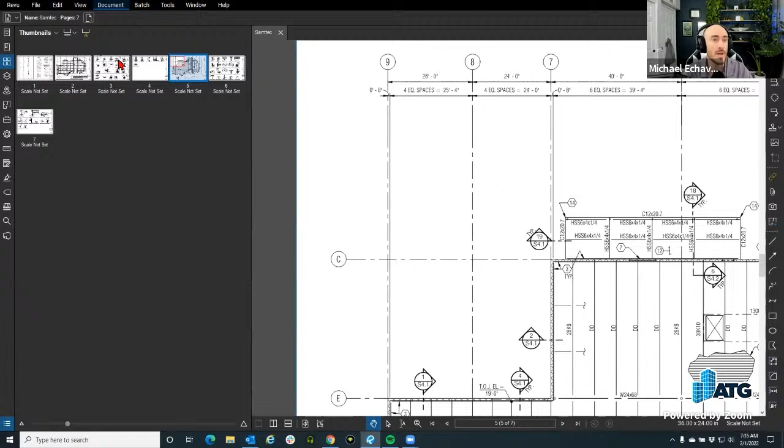So under the document here, you do have the option to go through and select the same commands that I'm going to show you in a second; they are also right here. Now, if you're in the thumbnails area, it is the 4-quadrant square. And if you do not see that panel, you can always right click and say show. And from the show, you can go down to the bottom. It's Alt plus T for the hotkey on this one.

Now, again, in the thumbnails panel, you can right click in the open area. You have the same document manipulation capabilities in here as well. One thing I do like to keynote in here is the markup summary report that you can quickly print out here versus having to open the summary from the markups list and then selecting the summary from here. You can always be in document management and right click and quickly create a markup summary report from here as well. I've never noticed it being there. Yes. Look at that. So that's always a great addition to see when you're right clicking.

You can go to the thumbnails top panel as well. You have the same drop downs, right? I just prefer to right click, just old habits die hard. Right. No doubt. I don't like to use menus as much as possible.

For those folks, I was actually seeing my eye doctor yesterday, that are not as, what would we call it, visually inclined, there's the smaller triangle on the left-hand side, the larger triangle on the right-hand side in your bottom location down here. And what you can do, it's a drag bar. So what it allows you to do is zoom in on some of your documents.

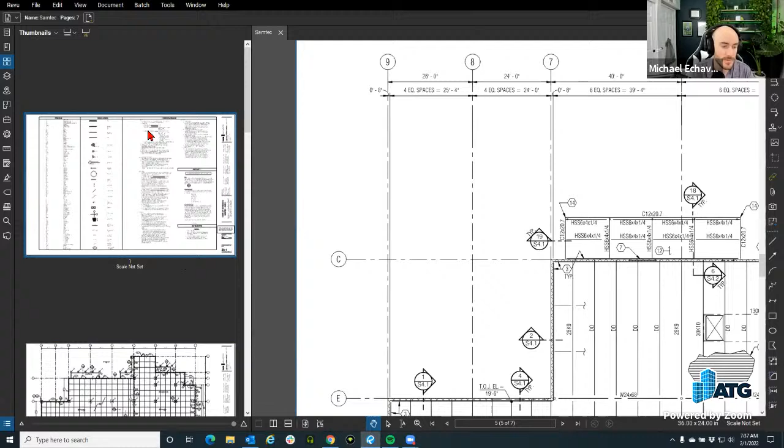Now let's cover some of these in here. I think I've done all of them, but if there is any Easter egg in here, of course, we're always going to talk about some Easter egg stuff. The first one we'll talk about is page setup. Would we agree, Jason? Yep. Okay. So page setup is great if you have an off-skewed scan, which would be like a raster. And there's some other things we could do in here as well.

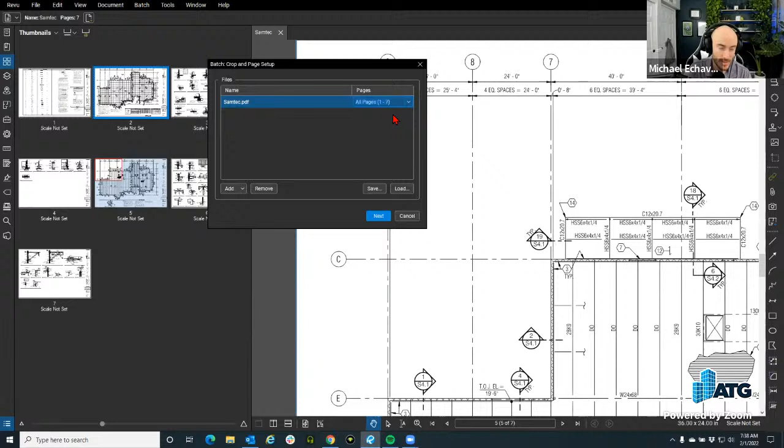But you can add PDFs from here before going in. You can also select specific pages. I'm going to do all pages instead of the selected. By default, it goes through what you have selected. Then we're going to hit next. And this is the window that we're going to be talking about. So there's a couple of different things that you can do within here. So you can change the size of the PDF set.

That does happen sometimes where folks ask, can we reduce it down to an 8.5 by 11 or whatever the half size is of the sheet by the correct scale? This is how we're going to accomplish that. You can do that directly in Revu. You don't have to go file, print, and reduce the size. This is the area where you would go through and do that to get it correct to the scale.

So you're saying that if you've got 11 by 17s and 36 by 24s, you can force them all to the same size? Yes. Well, you could force the ones that you selected. So you could go from the 24 by 36 to 11 by 17, and you're just going to select 11 by 17, and that's going to change these. With keeping the scale, right? Because that's what we want to do. Right. Yeah. So you get that auto scale checked on there. Yes.

And I don't know why you'd want portrait. You would want landscape, but you can select.

Now, if we're trying to rotate our pages, there's a get line. This would allow us to fix an off-centered or slightly rotated scan because they didn't butt it up against that corner. You could go and get a line, and then say you're going to rotate from this line however many degrees.

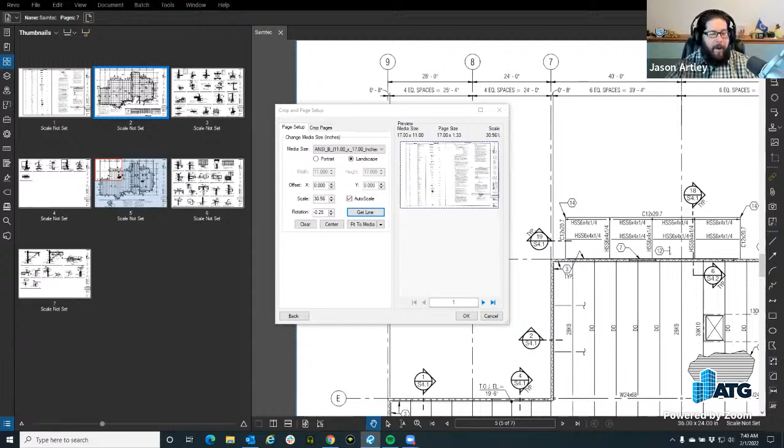That's huge, because I know in all the scanning I've done in my career, sometimes you go through them and think, oh, that one was off. You didn't get it in the corner right, or somebody bumped you or whatever else. Now you can fix it without having to rescan it. That's pretty big.

Now, the other one is crop pages. Do I need to go through and talk about cropping pages? Might as well.

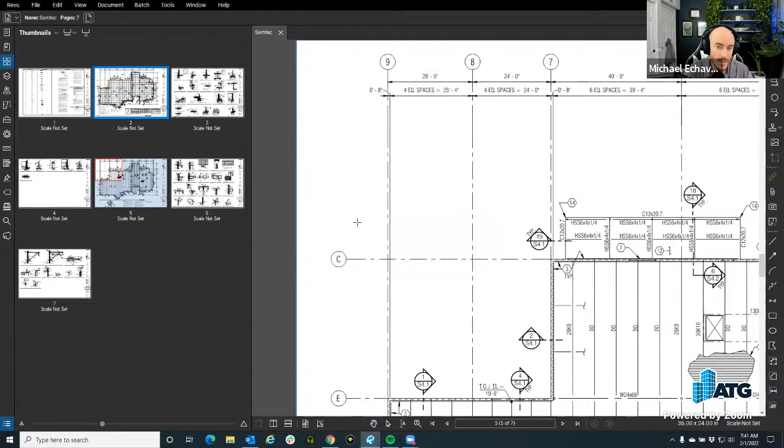So from here, you have the ability to go through and trim. You could bleed however you want to select specific content to crop to that location. These are your options down here. You also have the ability to clear that and get a window of where you want to crop.

Art box. I don't know what art box is. Oh, maybe you can just draw different ways and not just a rectangle or a four-sided thing. I don't know, I clicked it and it didn't do anything.

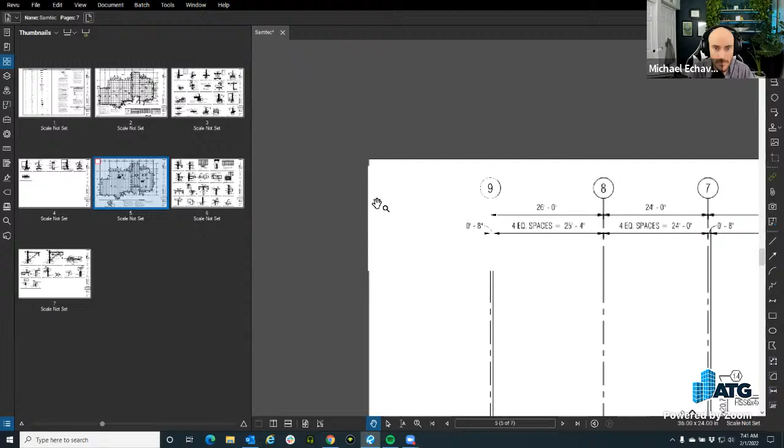Art box, it's probably like one of those blend things, you know. That's weird, like a stamp. It's a specific type of blend mode. It gives it a box.

Oh yeah, because that wasn't there. Okay, so it gives it a box around where it's cropped. Matt. Now you know. Good question. Now I know too.

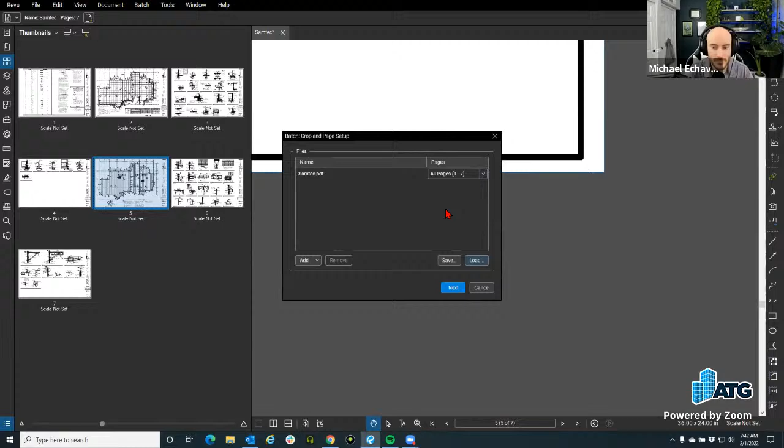All righty, okay, so let's go back and talk about some of the other items as well.

Now, right-clicking, you have set scale. This will allow you to set scale to your PDF sets. I was talking with somebody recently that the set scale in the older versions let you have a set scale just overall in Revu.

That's one thing that doesn't transfer over from the newer version, so just be aware you have to set scale per document. It's not setting scale in Revu as a whole, it's per document. That is a change, but you can set scale for the entire document set if you wanted to. So you can do custom range, current, all pages, if they're all the same.

I know for a fact these are different. And maybe if somebody wants to know about different view scales for different viewports, we can do that as well. Just ask in the chat or on YouTube Live, because we are YouTube Live as well.

So you can set the scale here. You do it by preset, meaning what already exists out of the box from Bluebeam in their software of Revu, or custom, which is picking from two points. This is what happens usually if you receive a PDF set that is scanned or not a known scale, but you know, or there is a known dimension.

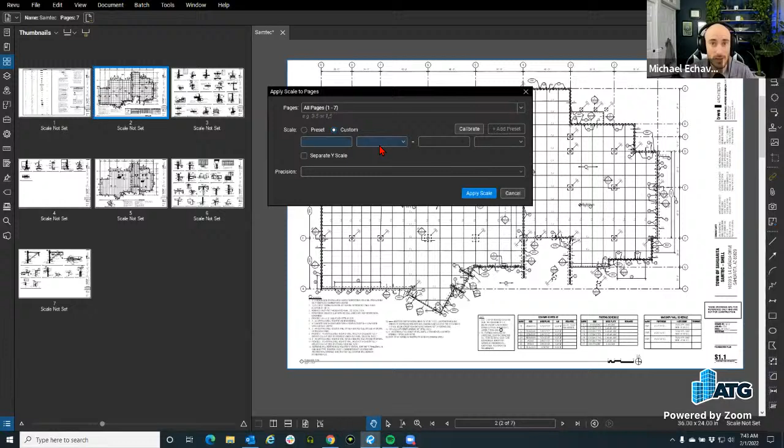Let me reword that. You want to go off of this first measurement, which will be the set dimension on the page, right? What is the actual dimension on the page size-wise, and then the reality of what it actually would be built. Was that correctly worded, Jason?

I would say so. So Chris has a good question: if you have a scan and you don't know the scale, but you want to plot it at 1/8 inch. This would be calibrating to figure out what known dimension you do have, and then you would use that scale document to scale it accordingly if you wanted it to print at 1/8 inch equals a foot.

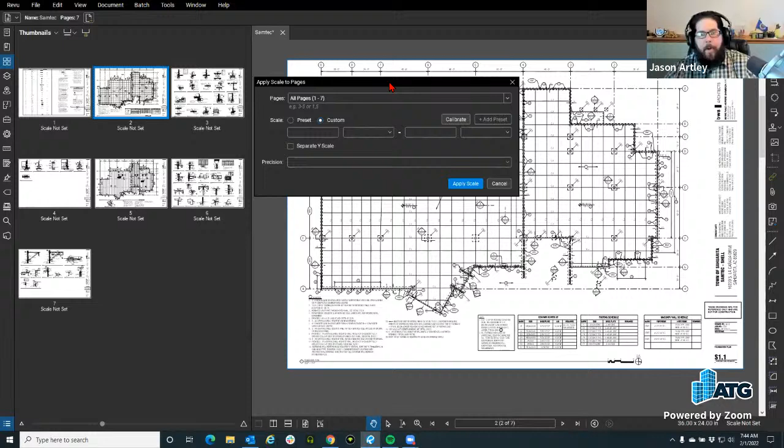It's always good to check. Never trust anything on here because we don't always know if it was created in Bluebeam, Adobe, or whatever version. So just because you see a scale bar doesn't mean you shouldn't get in there, calibrate to the scale bar, and double check everything.

Always verify. And if you're in the same department as civil, you can have a different Y. So X and Y for doing pipe networks or anything like that, you have the ability to do a separate Y scale, which is great for all of you folks on that PDF set. For me, not so much.

I neglect that checkbox a lot. And then your precision, so what is your... yes, 3/32. So your precision of what your rounding is going to be for your measurements, I prefer just to do 1, hit apply.

And now also, if you don't see them here in your thumbnails panel, the automatic measurements below, the first thing I always recommend is going to labels, which is this icon right here, hitting the drop down, and then you have labels and page scale. So you have those options to show that there's a scale below, which was an update, by the way, showing scale below your thumbnails, which, well, I'm not going to allude to anything until the end of this training.

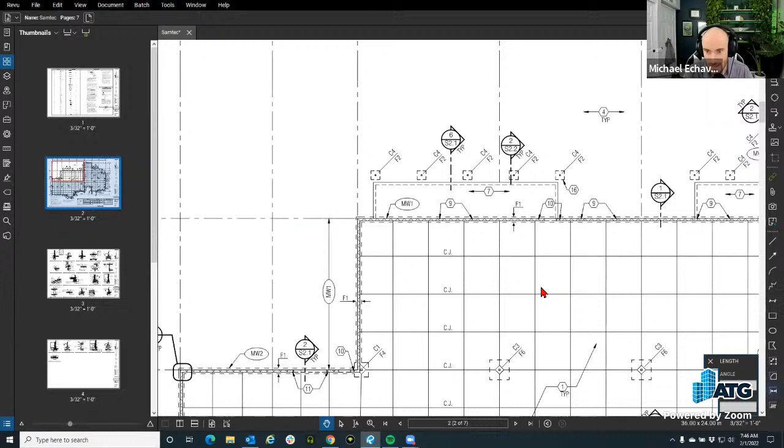But okay, so from here, now we have a set scale. We can go and do all of our measurements. And if you're wanting to look at all of our measurements and what our measurements do, we have an older morning coffee review that we have done before, and you can go in and measure off on your screen.

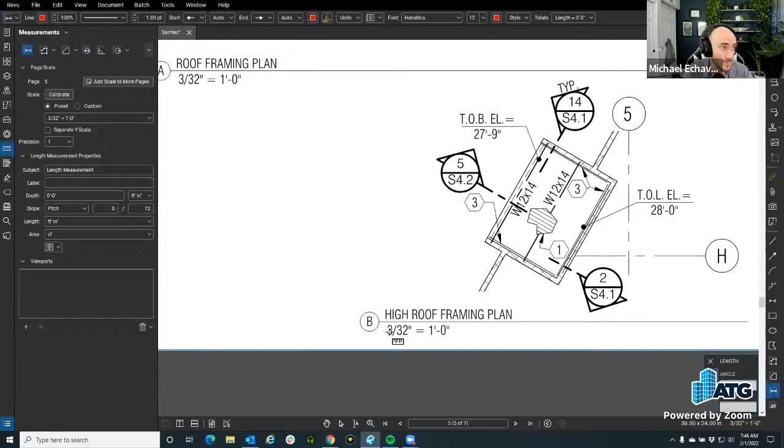Now, if you want different viewports, which this one doesn't have, let's see, does this one have? These are both 3/32nd. If you wanted to do a separate viewport, there is the measurements panel, and from there you have viewports, and this is where you'd create a secondary viewport to get two different scales on a specific page. Like if this wasn't 3/32nd, it was, I don't know, a quarter of an inch, you could do a viewport around it so your measurements were accurate for that specific area location on your PDF set.

That was the question that Marvin had. So you can have multiple scales on one page. Is there a limit to how many viewports you can have? I don't think so. I'll just tell you, I've never met the limit.

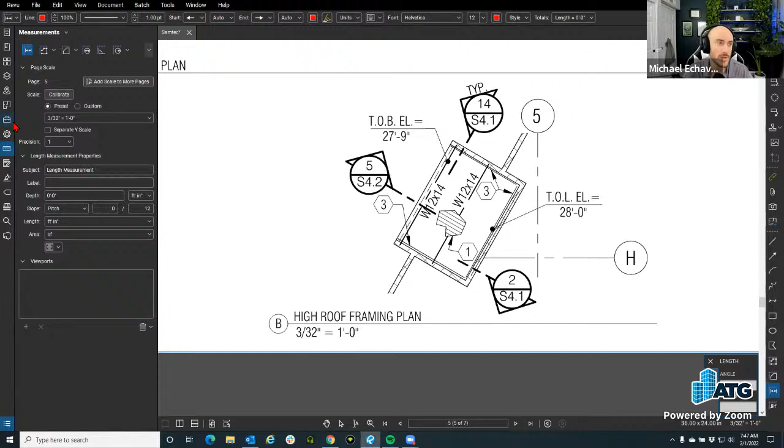And if you're looking at how to create these, we have a resource page, and I've done a blog on this, on how to quickly create viewports. So just a little reading. If you want us to show you, we can show you as well. We're not going to say just go to the blog, but there's a blog if you wanted to look.

All righty. So from here, back to the thumbnails location. Let me bring this back to here. So we had set scales. Now cut pages, which is, we all know, cut, copy, right?

Just Windows standard. So you can cut pages, you can copy pages, you can copy pages to a snapshot, which would be, so if I copy this page as a snapshot, I can just place a snapshot as well. So you can then paste it if you wanted to and overlay it wherever you needed to. So that's copying it as, is it? Why is there, it's not a page.

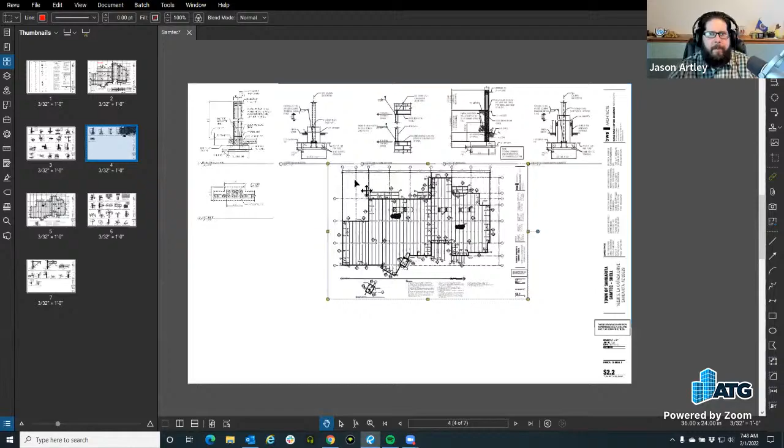That just gives you the content. It's an overlay, yeah. Sometimes when you do a snapshot, it grabs the white background too. Yeah, that's what I was saying. It's an actual overlay, that's cool. Normally it's getting the background too, but it's actually its own overlay. Then you can make this into a layer and stack them on top of each other.

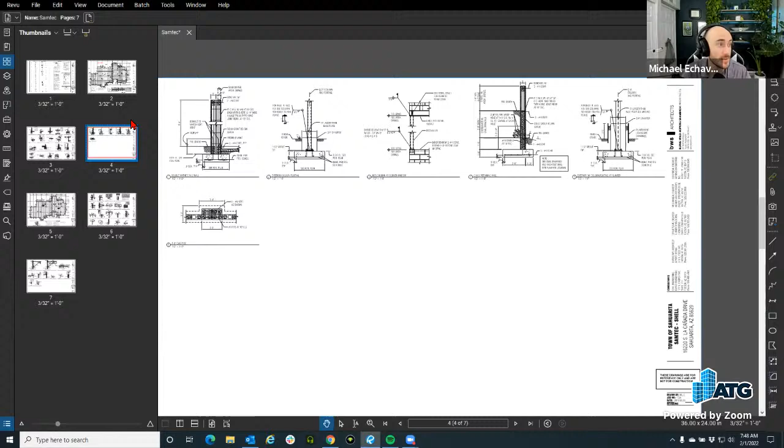Look at that, I learned something new today. So that is copying page to snapshot right here.

Vector snapshot doesn't take the background, says David. I've seen it do it before. Maybe we're losing our minds. Maybe we are losing our marbles here, because look at, you're right.

I want to cue that, like, I can't remember his name. Craig, the comedian from The Office. But he's like, I've seen it. Maybe you're right, Matt. Yeah.

Let's do raster. Snapshot includes vector data, and then it goes that route. Could be, there you go. You're right, raster data grabs everything.

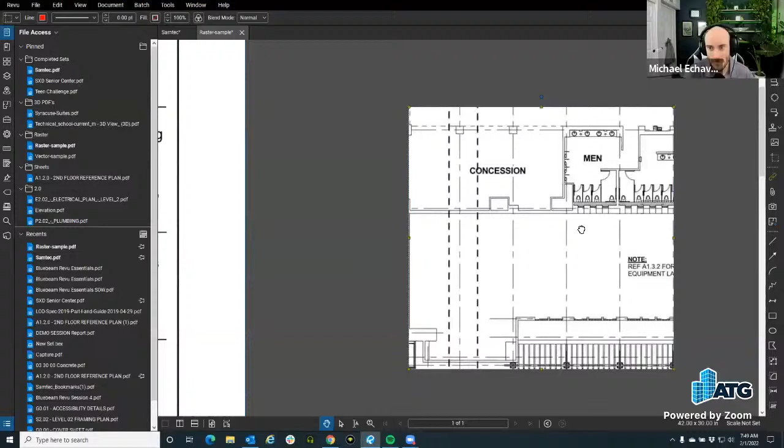See, Bluebeam Revu community - that's how this all works. Yeah, it was one of those things where I've seen it before, but I could be wrong. I'll admit whenever I'm wrong, and I was wrong - it was raster, shout out to Matt Lynn.

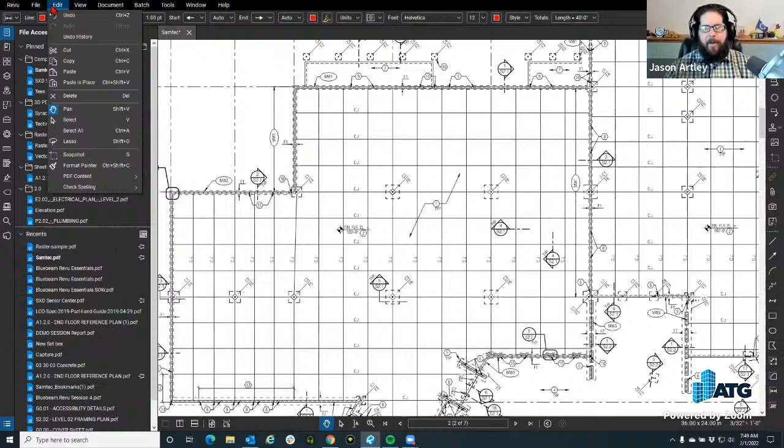David's got a good trick since we're on the snapshot thing - changing the color of the snapshot. So let's say I don't want to copy and paste this to say this is part of the set, but I'm just trying to indicate to the designer that this needs to be added here. Instead of it being native black and white color, which could be confused as being part of the set, you could right click on the snapshot and do change colors.

What this is going to do is grab your content - or if you were trying to make this a markup, since snapshots can be used as a markup saved in your tool chest. We talked about saving tool chests in part 1 or 2. So from the source color here, you're grabbing whatever the source location was, whatever's sourced out here.

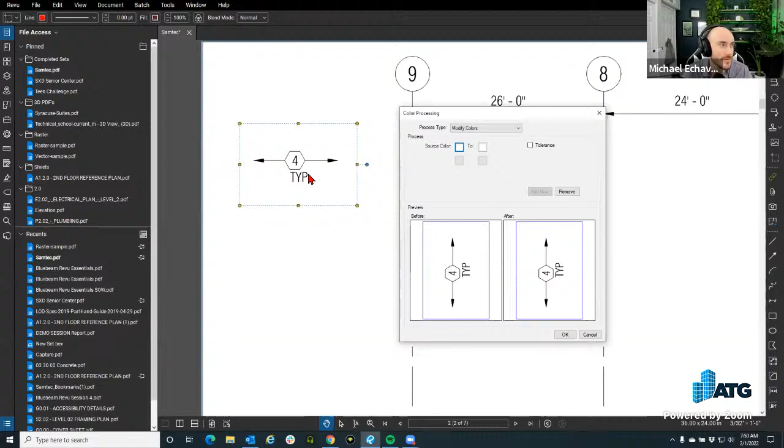See, I think this is where I got confused, because you can grab the white background here, but it's no white background. Does that make sense? So I could grab the white background here and make it magenta. It doesn't really find it. Yeah, maybe I was wrong.

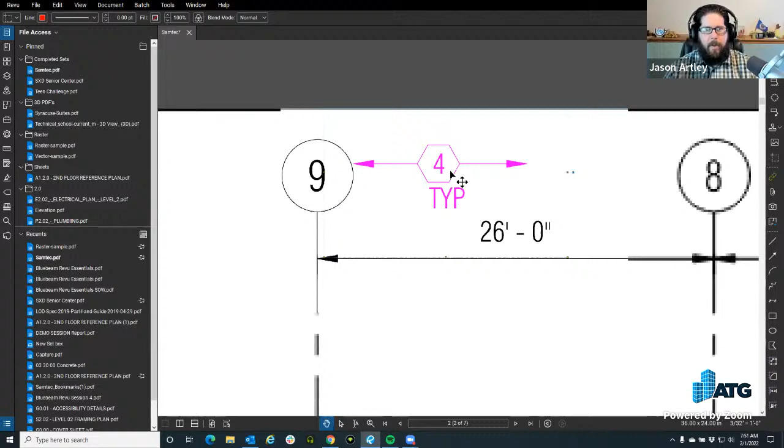But that's pretty slick because it works out to be a great markup or red line, and now that if we get to a truly paperless workflow, I would imagine we might see more colors in our plans and not just pure black anymore.

I think if we get truly to a paperless workflow, we don't need individual sheets. We can just have a supersized sheet and everything is on that one sheet. Why have individual sheets we have to scroll through when we can have larger sheets that just have locations, like a detail would be a plan area location on the sheet set.

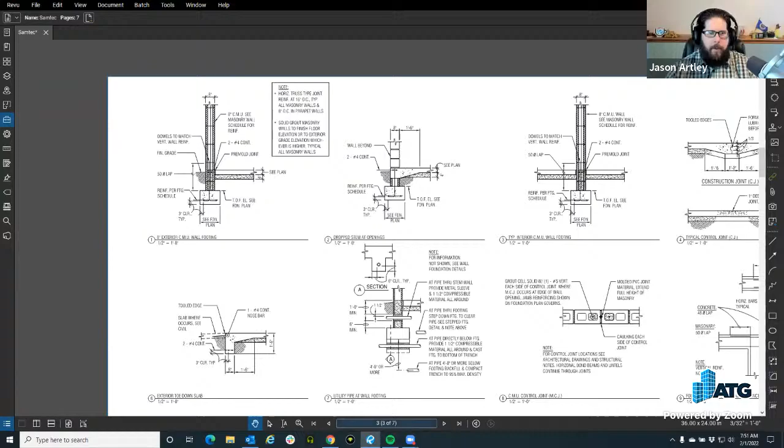Definitely possible - ideas, paperless pioneers. We're still stuck in this paperless workflow using same paper standards, like individual sheets, 36 by 24. Is that a social construct? Yeah, it's because of what can be printed out. So now we're in this new workflow.

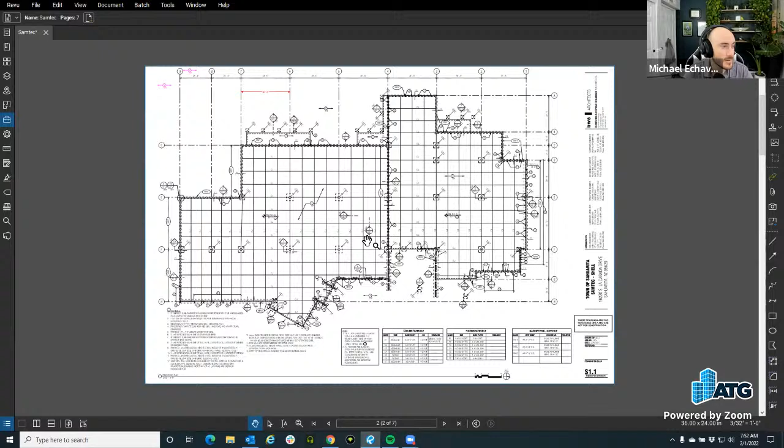PC load letter, anyway I won't finish that. It's hard to get the guys on the shop floor to use monitors. I get it, there is something satisfying with the tactile interaction with paper, but time's coming. Time is catching up to paper.

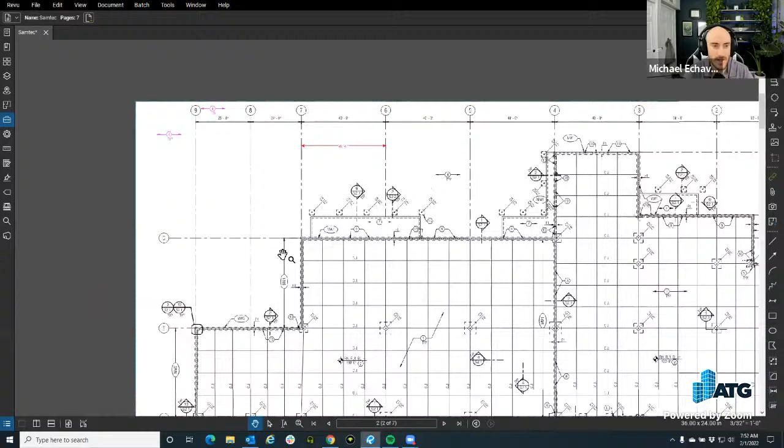Alright, so back to here, let's go back to thumbnails. Okay, because rabbit hole. Next one is applying a stamp.

We're going to apply an approved stamp - where are we going to apply it, what's the mode? By the way, we've done this before in another morning coffee Revu series where we've covered all of these individual ones because there's a lot. Jason and myself had no idea about all of their capabilities, and then we were enlightened.

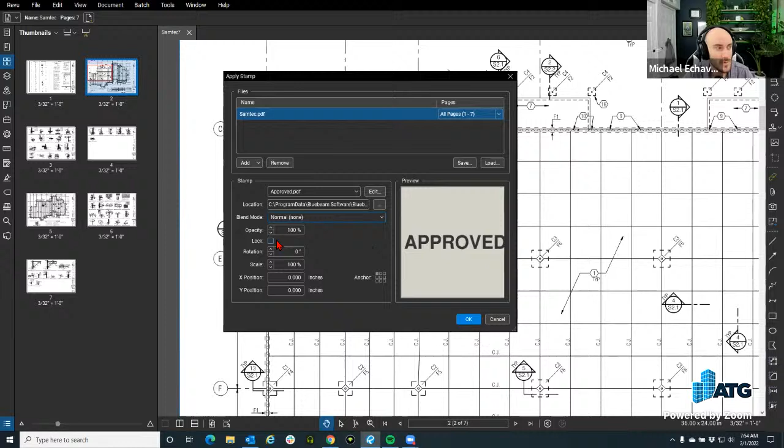Okay, opacity, all the standard things, and you can just hit apply. And there we are.

But again, it's stuck by the 4 quadrants. So that's the only downside of that one, that it's going to those locations, which may be perfect for what you're doing. But again, only those locations.

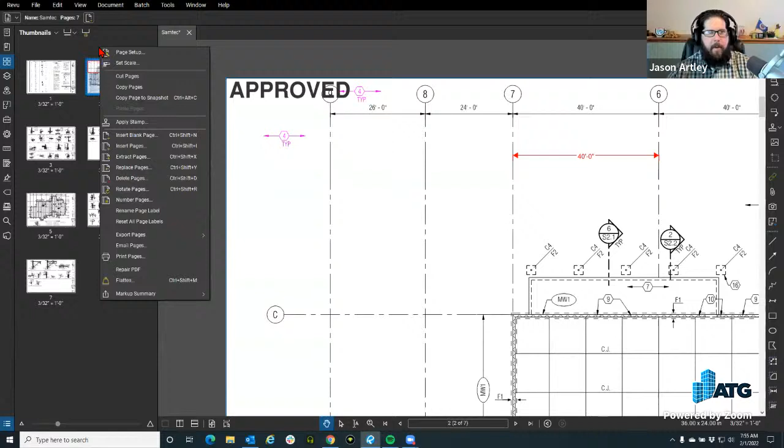There is an XY offset that could be set, and those XYs relate to that initial anchor position. So it does get a little confusing in that light. If you wanted it, say, in the lower right-hand corner and away from the border, you would enter in XY offsets. Exactly.

Next one is inserting a blank page. So what Revu does, and what Bluebeam preaches about Revu being as a differentiator, is less clicks to accomplish things. And that's really going to shine when we're going through the rest of these.

Now, if we want to insert a blank page, you select this and you get to insert from your out-of-the-box templates. These are just supplied from Revu - a punch list, RFI - but you could create your own templates, and then any standard page.

Now, custom, you're just deciding what the page height and page size are going to be. So 36 by 24 - we're going to use the 36 by 24. There it is, ARCH D.

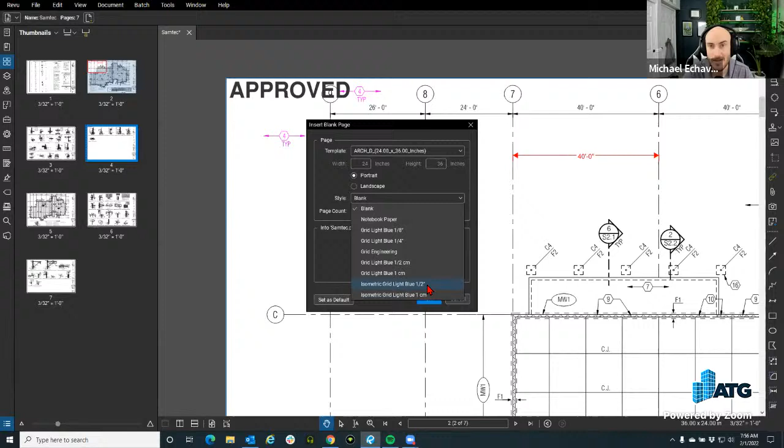And then the style, again, whatever you'd like to use. If you go out and buy isometric paper, you don't have to - Revu has them, and you can just sketch in Revu, or any grid paper, or even note paper. We'll just use note paper for this instance.

Page count, where are you going to insert it? This is the most important second part. Is it going after the last page, or on the first page and after or before that? So you have after or before the insertion. And then you have what page - instead of using first or last, you can pick what page, and whether it's before or after that page.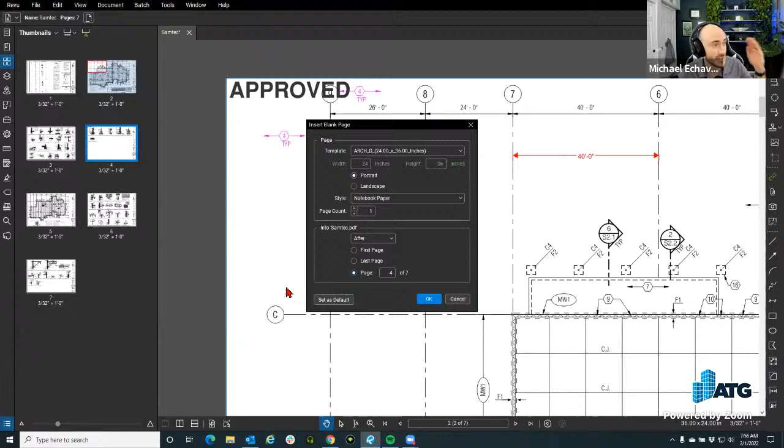You get to select. Sorry, I've watched a couple of our old YouTube videos and thought, Mike, why are you staring always to the left? That's because I'm looking at Jason when I talk, since he's the only face I see, and he's over on my left-hand screen. I apologize for not always staring right here where my camera is.

It gets tricky sometimes. So before you hit OK here, this is another great use of that snapshot tool, right? Let's say you needed to add another sheet that had a couple details on it. You can totally take that title block, make a template out of it, have a whole sheet ready to go, and you don't even have to touch CAD again.

Yep. All right, hit OK here. So now I have my note paper. Ooh, I bet that looks really cool on your vertical screen.

Now, the reason why I brought it in as portrait is because we're going to use rotate pages in a little bit. Now, the next one down is going to be insert pages.

From the insert pages selection, you get to select what pages you want to bring in from a different PDF set. And I shouldn't say pages - it's whatever documents or pages, because you can bring over the entire document set if you wanted to.

Now, it's going to bring you into the second window once you've hit OK. The second window is for inserting files, which ones you wanted to bring in. You can add more from here if you'd like. Let me add a couple so I can show you, because you're going to reorganize these.

Now, from here, these are the order of them being brought in, okay? So this one is going to be first, second, third, all the way down - these are all going to be brought in that order. And again, down here, which we had in that past window, is where they're going to be brought in to.

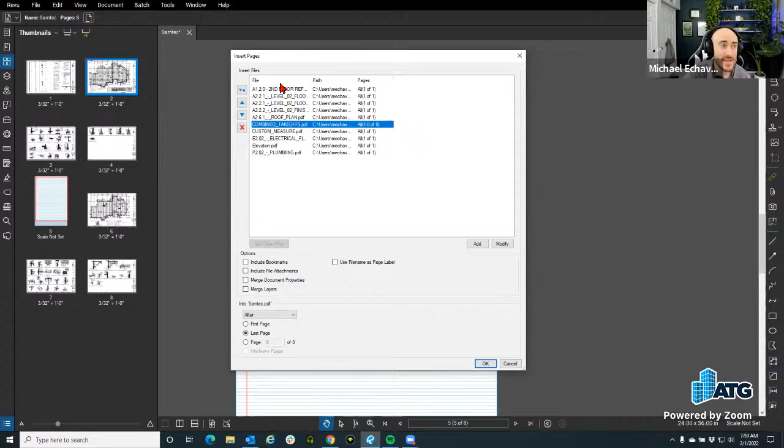Now, if it was one PDF set and it was a combined PDF set, you would actually be able to interweave, which would mean the first page being brought in would be right after the first page in your document. Second, they're interweaving, right? We all hopefully know what that means. If not, I'll just default and say Google.

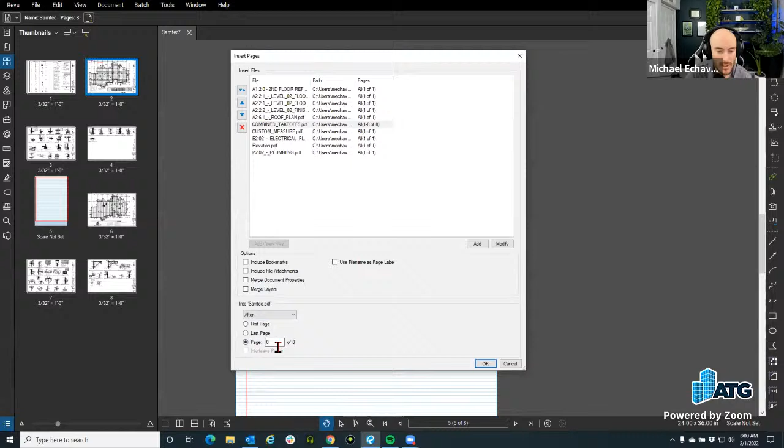So first, last page. So you get to decide, hey, it's bringing in the first page after, and it's going to interweave every segment after, or last page, or you're bringing in at a set page number. We'll just bring the first page, well, actually the last page, and we'll go after the last page. And then all of these will be brought in. And hit OK.

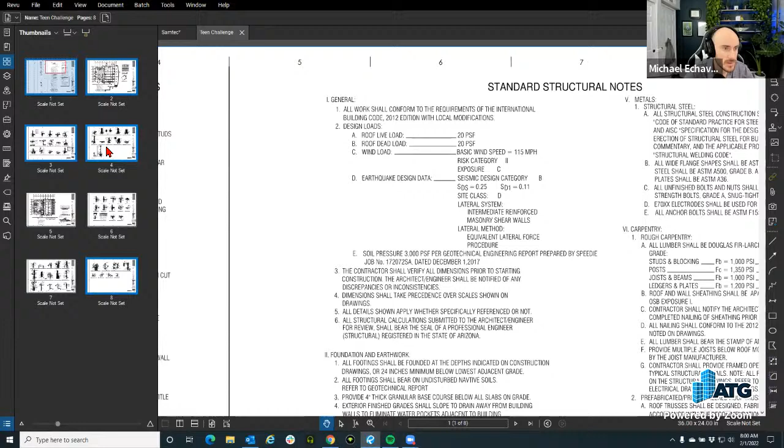And here we are. Now, one thing I will show here as well is you can always open up a PDF set and grab pages from here using Control or Shift, however you want to select, right? We'll do Control as well. Copy. So right click using this copy feature and then go to your other set and paste here. So that's another way to insert pages. It's up to you on which one you prefer.

But as you see here, there's a little blue line. That is where they're going to be pasted. So just be aware, wherever that line is, location-wise, is where they're going to be brought into, pasting, I guess, or inserting.

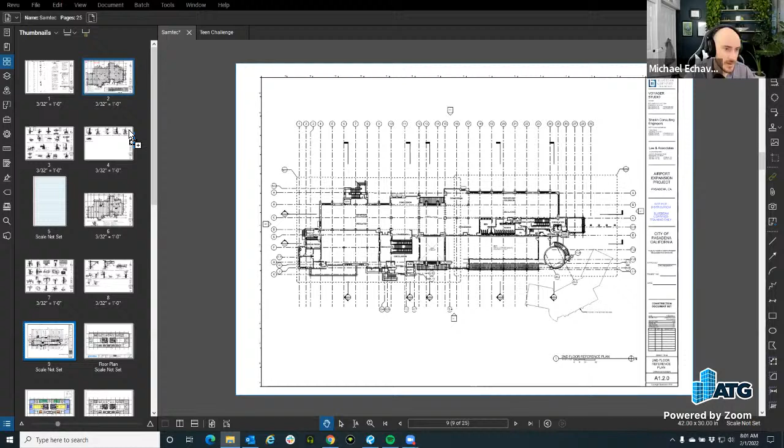So we got a couple good questions. One's from John here. Can you drag and drop files to insert? I've never done that. So drag. Oh, you mean from like Explorer, maybe? Yeah, from Explorer. I think someone's asked that before and we randomly did it. And I think it was actually Matt. Let me see. Yeah, you can. Good. So it's the same line. Yep. Good question.

And then another good question from David here. You created that sheet number 5 now that has your notebook paper on it. If you put text on it, will it allow you to put text right on the lines, or do you have to manually do it? Oh, look at you being sneaky with your eXtreme only feature. I think it's doing all pages. Yeah, it is.

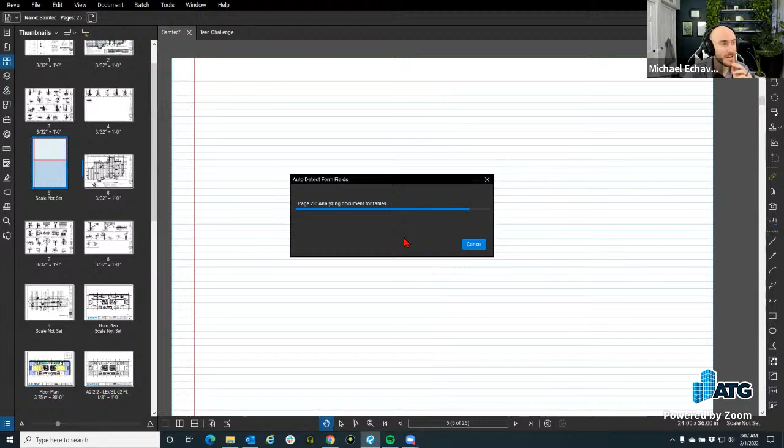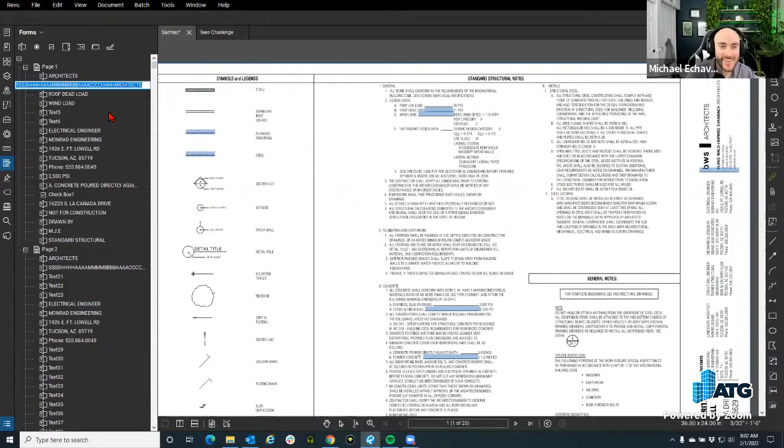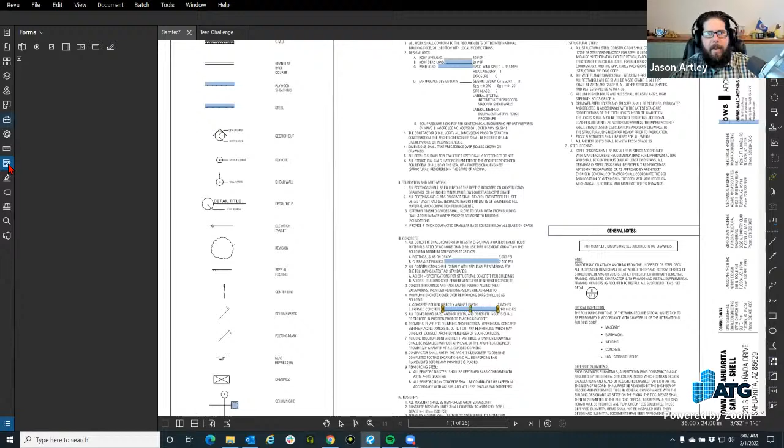So what he ran was the auto form text boxes. I guess you can make a multi-line text, but you'd have to figure out the spacing just right. That would be cool though, David, but I don't think it's going to work. Not without some experimentation. Oh, you can use typewriter, can't you? Well, I forget about that. It is snapping, so that's kind of cool. Yeah, you could use typewriter.

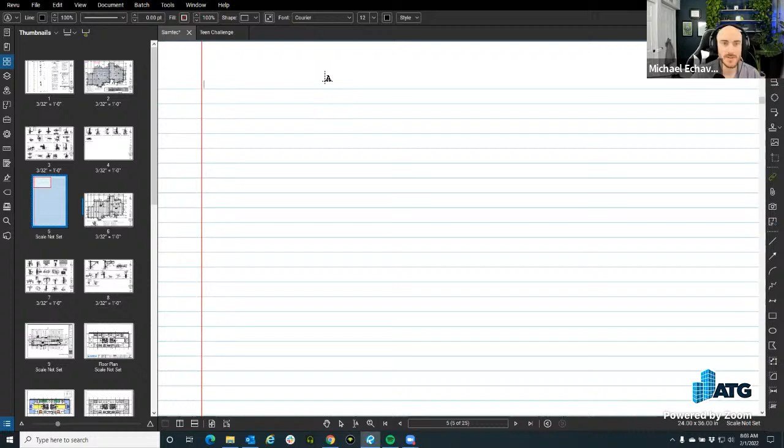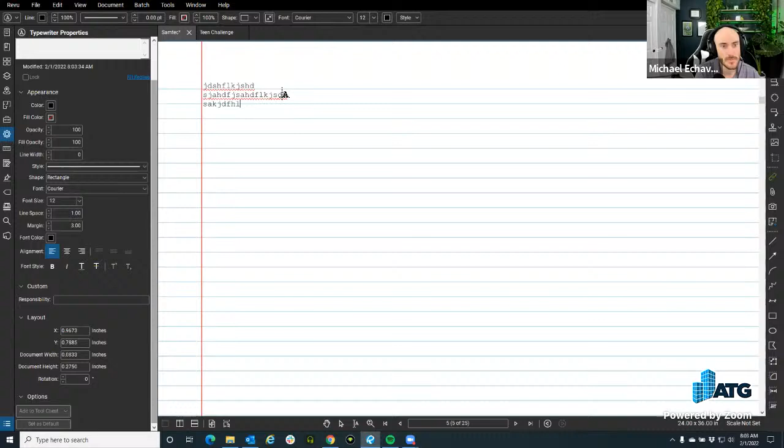I think there's a multi-text feature setting in here, right? Is there? I've never seen that. You're telling stories. Okay, so let's go back and type out here. Maybe if your text height is larger. Yeah, or if you had a text box, you have control of your spacing. Oh, I suppose you have line space there too. It's set at 1 right now. Bump that up to 1.25.

Where's line space at? Oh, right there. Does that do anything? There you go. That looks pretty good. 1.2. So yeah, there's a little bit of experimentation you could do.

Yeah, it looks like that would work, right? And then, yeah, for whatever size text you need, you just up your line spacing.

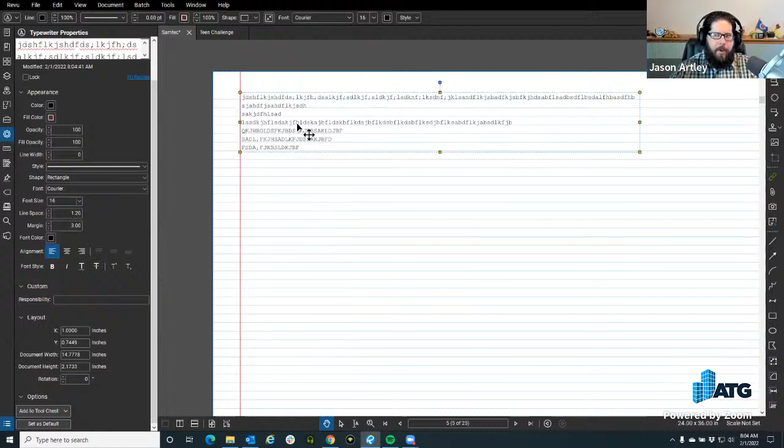Mm-hmm. Oops, caps lock. Look at that. Okay. There's the caps lock on, actually showed in the Zoom. It did? Yeah. All right. Good little rabbit hole there. Thanks, David.

All right. So you've inserted pages. But remember, before you inserted those pages, you had set those scales. So that scale that you set originally did not apply to the new documents that you put in. Correct. No bueno. But unless it was saved originally, right? So some of these had saved. So when you save a document, the scale gets saved to it. So if I were to hit save, I'm not going to. It's going to overwrite my document set here. But okay, back to here.

So we had the inserting pages, and I talked about copying them over. Someone asked about drag and drop, and then we went down a rabbit hole about can we type on this page. Next one is extracting pages. This is great if you have a larger PDF set, right? It's large in terms of file size. Things aren't rendering properly. Someone sent you a PDF set that has a bunch of incorrect raster data, which would be like GIFs in the viewports, which can still happen in vector data, by the way.

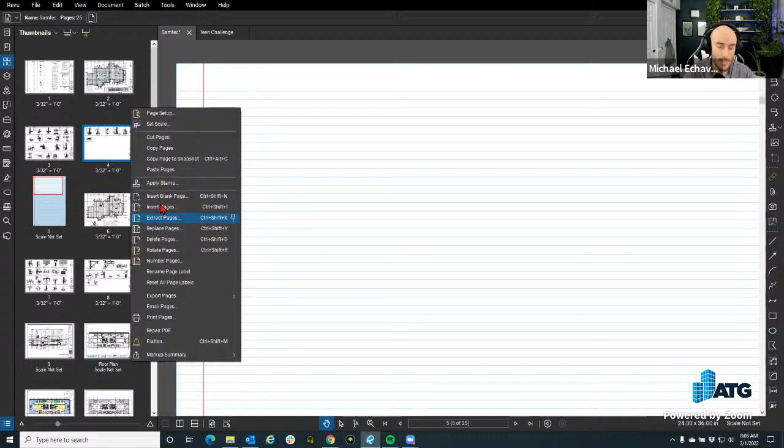But I need to extract them as individual sheet sets. You have extract here, and this will bring out your PDF sets. You can pick, again, your custom range, whatever ones you want to bring over. Your options are to delete pages after extracting. So if I bring these out, am I going to delete them after they've been brought out? And then if I'm going to extract the files as separate, are they going to be named differently? You probably would want to rename these first before you extract them out, because then there's going to be 1, 2, 3 if you're going to use the page labels to name the files.

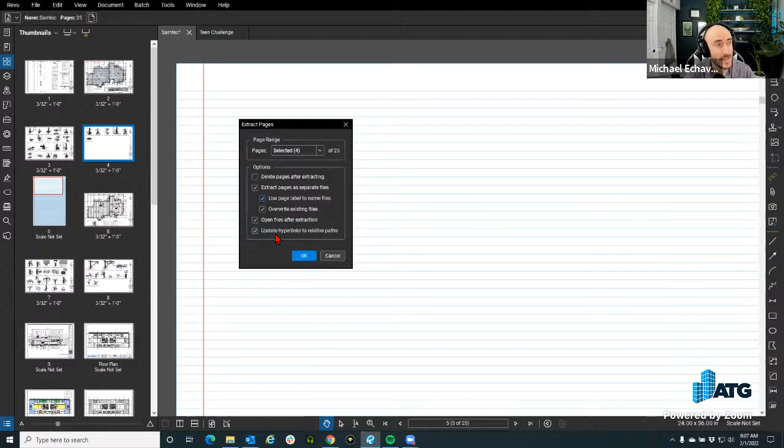If there's already any existing, are you going to open files after extraction? And are you going to update the hyperlinks? So if any hyperlinks were working, meaning they're jumping to a page or to a place or to a space, are my hyperlinks going to work still? Yes. But again, that's on your local network or wherever you're storing it, because they're going to be going to that file location, and it may not work. Whereas if they're a combined set, they're jumping to a place or space in that combined set, and that can be transferred. But if they're going to a file location, it may not work. But okay, back to here.

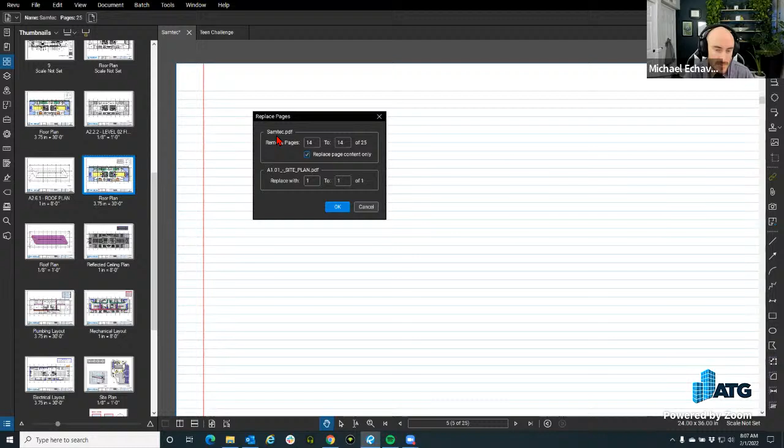Right click again, replace pages. So do I need to replace a page with another page? So there's a new revision. Can I go through and do that? Yes, you can. So from here, you can remove pages. You can replace page content only, so the markups stay. That is a new one as well. Not a new one, sorry. I'm showing the new one for me because I forgot about this portion. So if you wanted to bring in that PDF and keep your markups and change the page out, you could do that. So here are the options for that. You're saying I'm going to replace a specific page in this document set with this page of this document set here.

Next one down is deleting pages. We all know what that is, so I'm not going to show that. I wonder if delete on your keyboard works. It does. So we're getting at the rotate pages one, and this is something that pops up in our support every now and then, and it's something I know I'm guilty of too. But to best illustrate, can you change your profile to Revu Advanced? I think it's all right. Rotate pages versus rotate view. So you're on rotate pages. You can rotate pages and you can rotate view, which can cause you some headaches if you get it wrong.

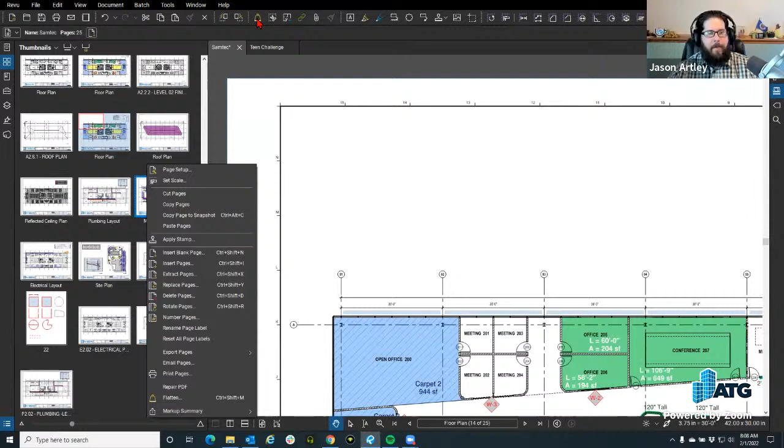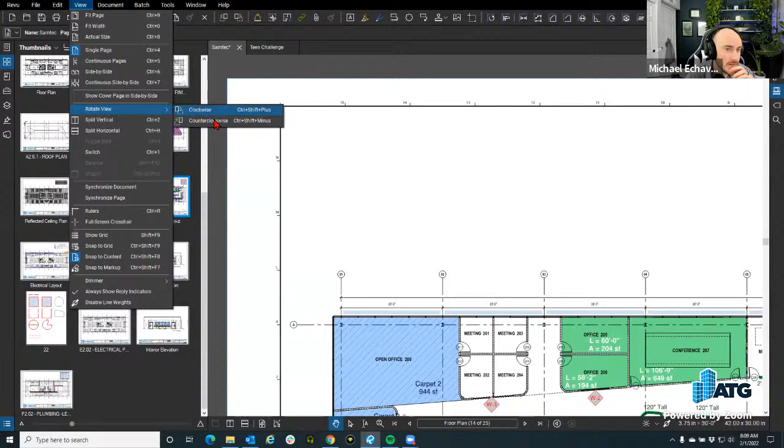You can rotate view. What do you mean by that? You can rotate view. So that on your... Wow, I've never done this. Really? Yeah. So this is handy for a lot of things. It didn't flip the page. So you can rotate the page or you can rotate the view. So some people see that button on the toolbar in the Revu Advanced profile, and they think that they're actually rotating clockwise. But what they're doing is they're rotating either a whole bunch of things or just the view.

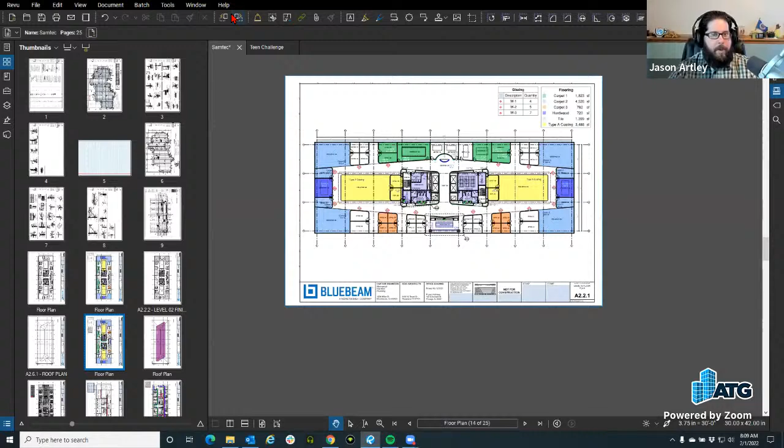So, whoa, rotate pages. They're from the bottom. Look at all those undo things. How do I go back? It's doing all of them this way. I want to just do this one.

That is confusing. So this does all of them versus singular. I just would take these out. Yep. But because I usually use this one. I don't ever use these or that view. So this was new to me today. You got your two new ones today. Awesome. Yes. And that's probably because no one's ever asked to rotate the view. It's just the PDF that's been rotated, right?

So going into here, if you want to rotate pages, someone sent you a document set and you have some portrait ones and they're all supposed to be landscape. This is what you would use this tool for, or singular rotation. I prefer the other one. So from here, I don't have to go through my 100-page document set. Some of them are portrait, but they all should be landscape.

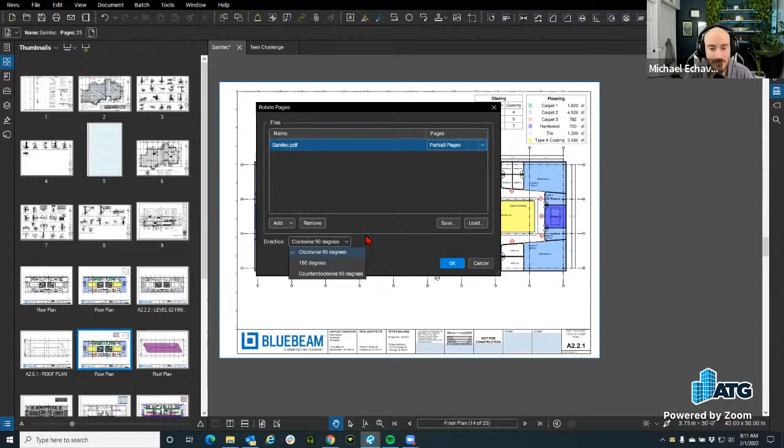What I can do here is I can go to rotate pages, and I can tell Revu to rotate pages by a specific original orientation. So from here, I can go and say, hey, all portrait pages need to be rotated whatever degree. And it's not rotating the view, like Jason was saying, it's rotating the actual page, right? Exactly. John thinks that rotate view is just for the session, so it doesn't save with the PDF. Could be. I don't know. I'd have to close out of Revu to do that.

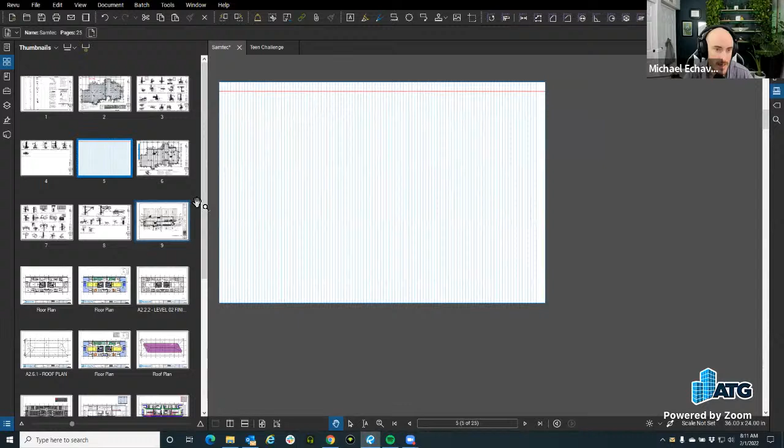So from here, clockwise and hit OK. And now it's rotated all of my portraits 90 degrees. Perfect. To landscape. So, great thing to do for document management, because it does come up more than you'd think, especially if you're getting files from different people that you're compiling. It's created all of these. That's crazy. My control joints have forms in it now.

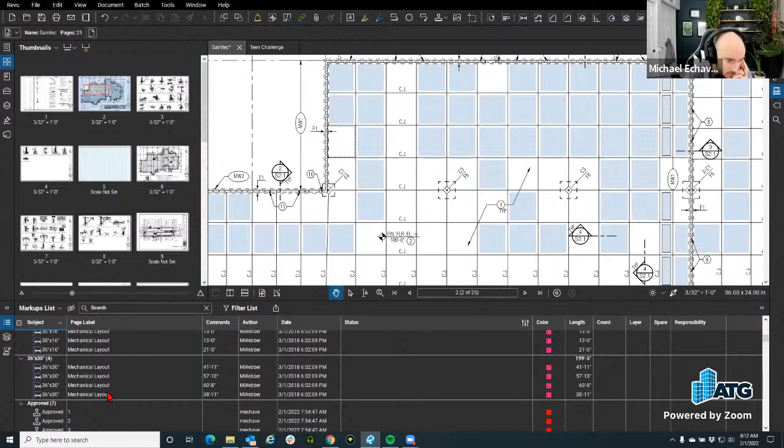Yeah. All righty. Number pages is next. So if you wanted to number these correctly or in a different manner, you can go through and do that. We've done a whole video on page labels. But does the page label change down here? Yes. It should, right? Good for plan bingo. Okay. B10.

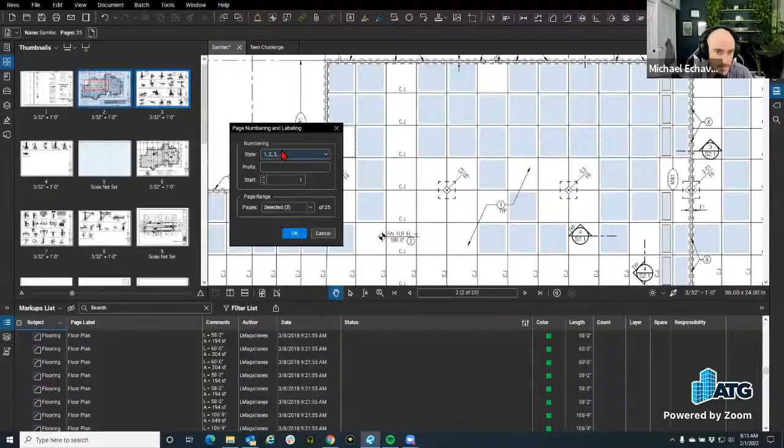So you have, where was I? You were on number pages. Number pages, yes. So we can go through number pages. Rename page labels. So wait, number pages is different than page label then, right? Yes. Because numbers are numbers, page labels are labels. So if you wanted to call them site plans or details, if you wanted it to be prefixed, maybe. So that EX1 shows that was sheet 3.

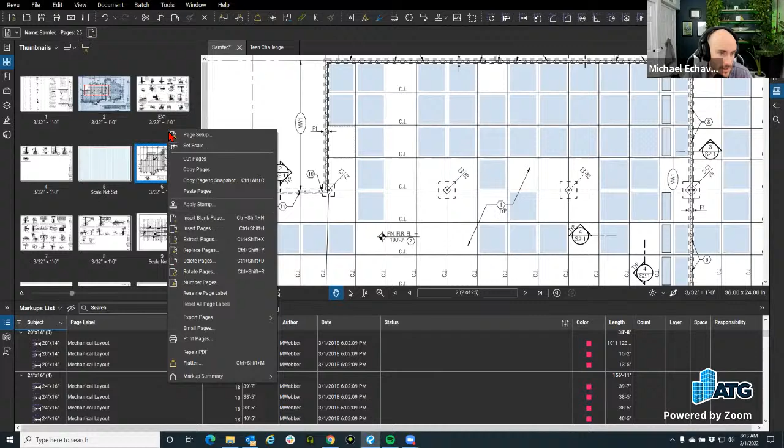Does the number pages put a number on the page? No, it does not. However, you can make it do that with headers and footers. See, I have nowhere to see the page number now. So what's the point of having page number? If it's not named, then it gets the number, maybe? See, this says EX1. I guess, can I do all? Hold on. Reset all page labels. Selected all. And you had it start at 4. So now everything is changing the label. So the number is the label. That's confusing.

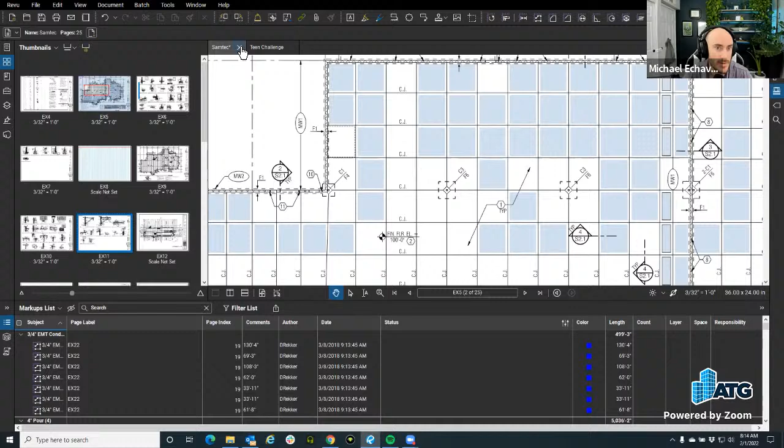Page numbering and labeling. Look at that. So I guess if you want to number them as their page label, that's what you would do. And then if you wanted to page label them by the naming of them or something, you could do that as well. And that's right here, create page labels. Let me close out of this set that has all these inserted items in it and reopen it. You could go down to the bottom right of your title block, whatever data you want to grab. Bookmarks would be the same way. You would grab a page region and say, hey, go look for that data that you want.

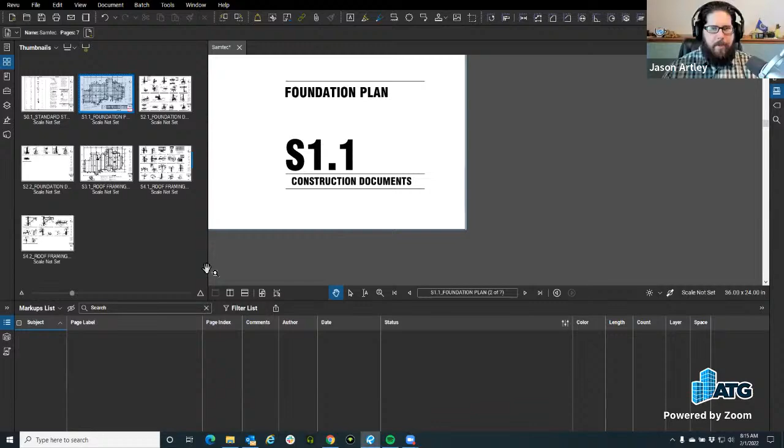Add a secondary one. That's one of my favorite tricks. It's so handy. Yep. Underutilized, certainly by me. And I haven't seen a whole lot of other folks use this too, but it's just so easy. You harness the power of those vector text objects inside of your PDF and make it do all the work for you. Yeah, then you don't have to go through and do it yourself. Okay. Right click.

Reset. Okay. Export pages. So we know that Revu can export the PDFs out as a different extension, like a TIFF, a JPEG, PNG, Word, Excel. Now I get this question a lot, and I guess not a lot. Most recently it was a lot because of people and what they do for their profession. But if you're exporting out to Microsoft Word, and people like to compare apples to apples for different exports of software, they're going to have the same type of issue when exporting out or running an OCR.

So if I received a raster PDF, so let me give you a full explanation. If I receive a raster PDF, someone sent me a raster PDF, they scanned a Word document or it looks like a Word document, right? We're talking about like a spec doc. They scanned it, they sent it to me, and I want that to be in Word as well. It all comes down to how the DPI was written on that PDF set.

Any export software solution, if you're running the optical character recognition, which is eXtreme only in Revu, and I think it's an extreme version only in a different type of software provider, but you can ask me about that if you want. It's going to only get you as much as it can from the OCR if it's raster versus vector, and that raster DPI is going to be a key player in that.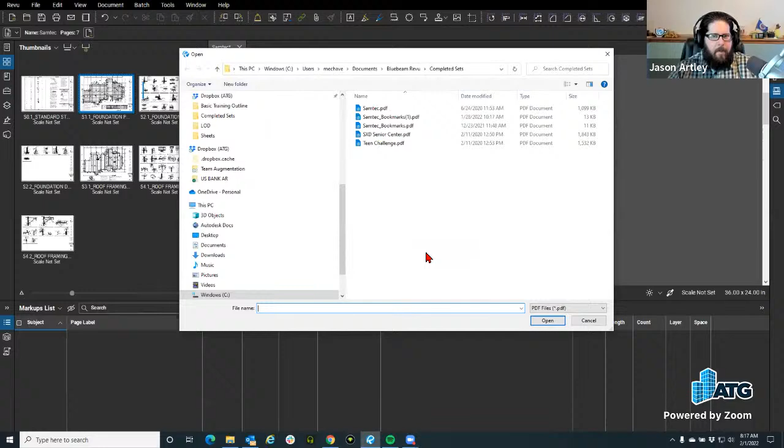But even then. So David's got a really good comment here that I've never even tried, and I'm curious to know if you have. So he says, exporting to Word works well with tables. So you copy a table from Word to Excel. Because if you go right to Excel, which this can do, it adds too many columns. Never tried it. I don't deal with tables a whole lot in Word. Actually, I do, and I hate that. I'm not a fan. So if I bring this out to Word instead.

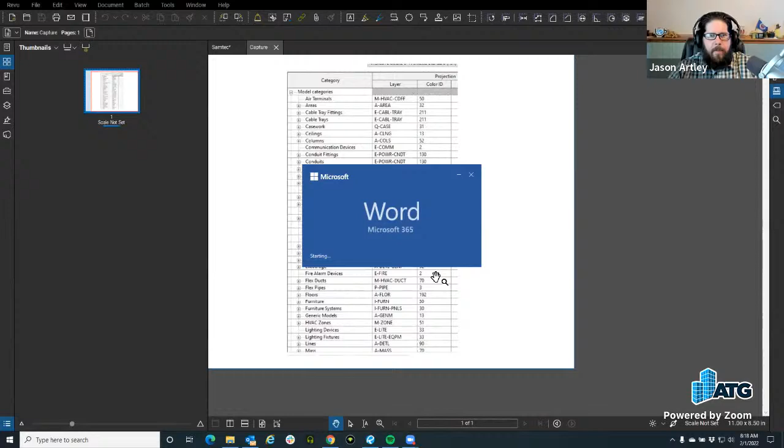Okay. Works well with quotes. Exporting to PowerPoint auto flattens the file. That's a good tip there. Thanks, Dave. And then it's still giving me some of the messed up stuff because this is what I see in Excel anyways. Yeah, I guess it didn't know what to do with those drop-down boxes and just gave you T's and dashes and stuff. But look at your layer. You've got whatever that was for your conduit.

And here, so this is what happens when it's not understanding the data. Oh, I don't know where that image went. It makes it an image. See that? That's an image right here. I can't click it. In Excel, you're able to click the image. From here, you can't. It's an entire image right there. Yeah. Dealing with tables in Excel is easier than tables in Word. Absolutely. But there's probably some more tricks here. So now you know there's the images. Layer's still an image too. Boom. It looks like it got some of the sizes weird for your fonts for like conduit and curtain panels. Maybe it's just an optical illusion, but those fonts look like a different size or width.

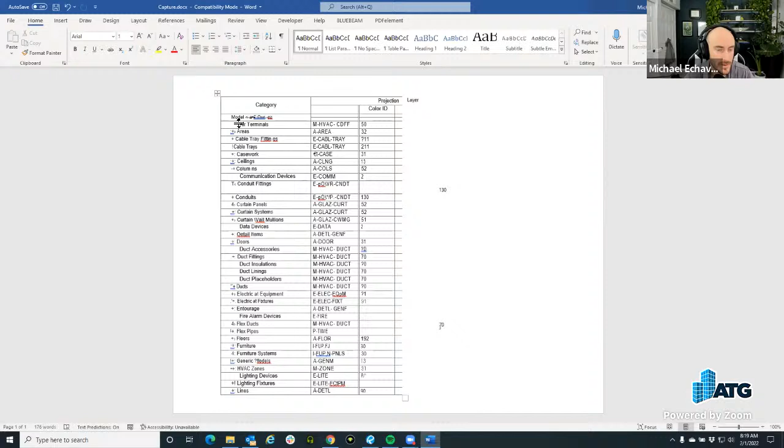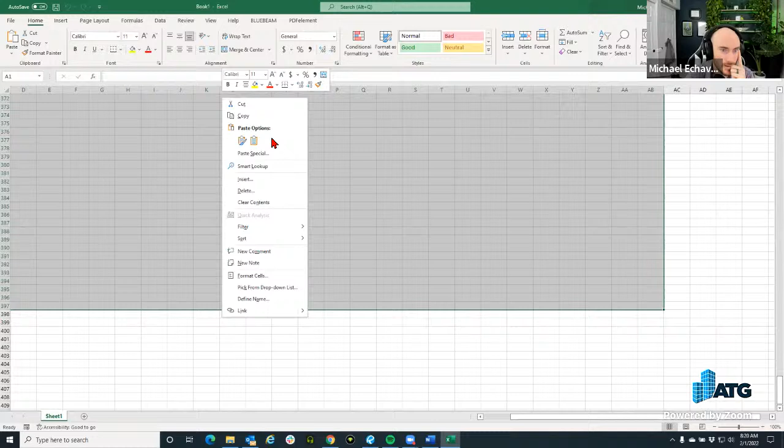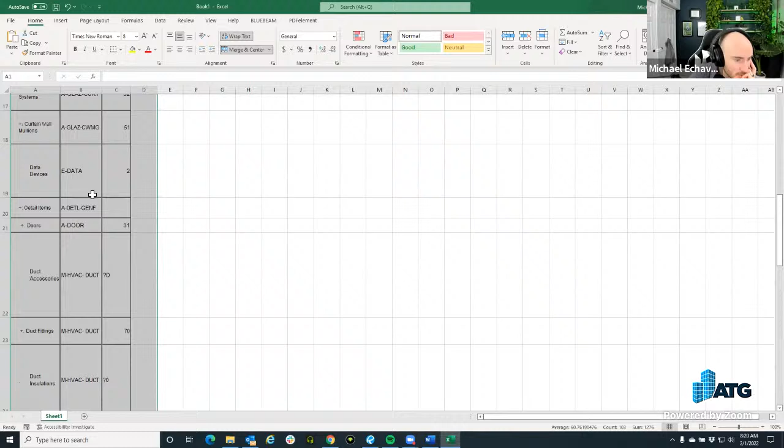And this is a good old thing that Matt showed me. I wonder if Matt knew that the columns list or the markups list was following the same as Excel. So if you double click these, it does the same thing. Interesting. So yeah, it looks like it fixed some of that stuff. And yeah, you only got the couple columns. That's an interesting thing to check, David. Thanks for sharing that.

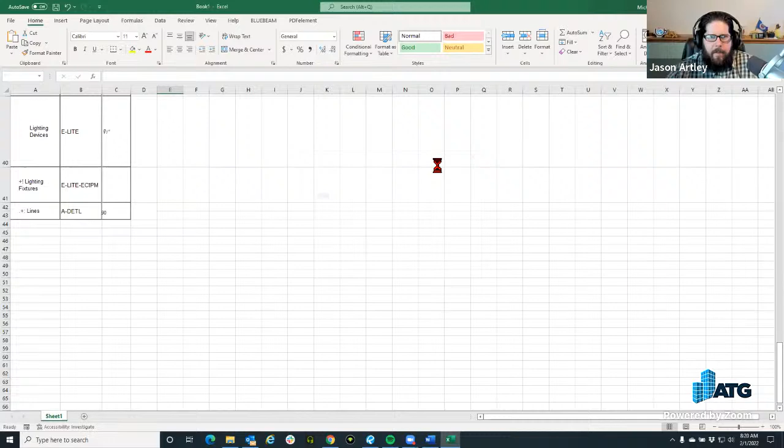Okay. Back in here. Next one is email pages. Now, this is great because I always love to show people this, because currently some people's workflow, which is great, is they go to Outlook, start the email chain, then they do a file attachment, look for the file attachment. But if you've already edited it, you're starting to redline and then you're saving as, don't leave Revu. You can email from Revu.

So right here, this document, I've marked it up and I'm ready to send it to the designer, right? The engineer goes through marking up, correcting things, then sending it back to the designer or the lead, whatever position you want to call it.

And then they go into here and email it to them usually, right? Or hopefully they're not printing it out and walking it down to hand it to them. But from here, I can email directly. What this does is bring up your default email provider. This one is Outlook. It already gives it a subject and already attaches the file.

Oh wait, let's remember one thing here. It remembers to attach the file, because I know we're all guilty of it, sending the email saying here's the markups and then forgetting the attachment. If there's anybody on this call who's never done that, you're lying. So this helps for sure.

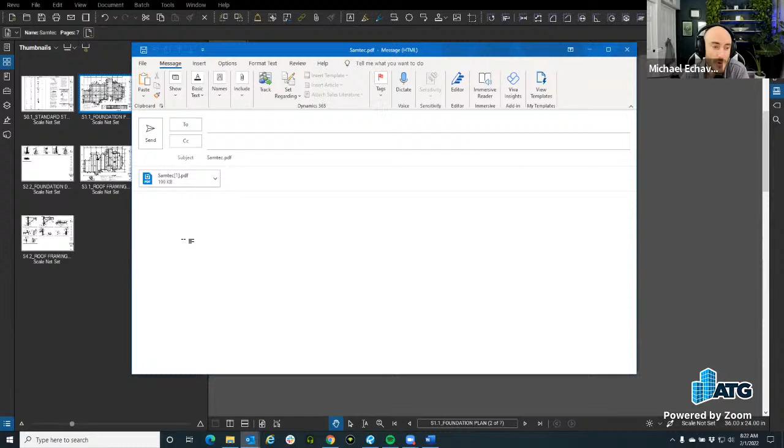But if you forget to attach in Outlook, it says, hey, you should attach something.

The other email option is also up here. I don't think there's email from template... actually, file, email from templates. I've created one of these. Basically what these are is you already have who it's going to be assigned to email to.

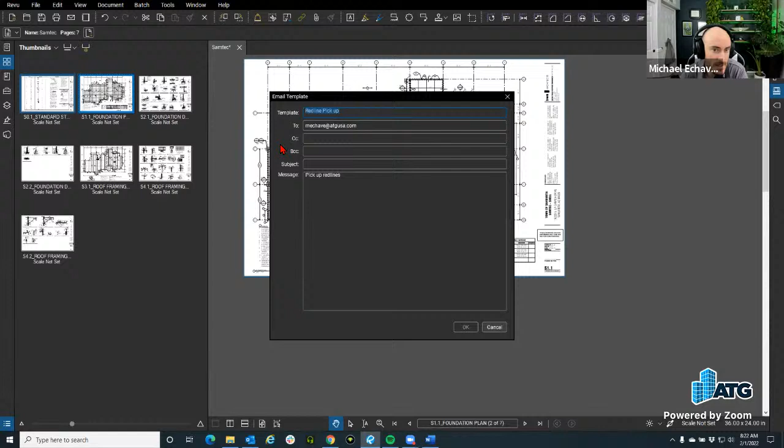So watch what happens here: if I email this from the template, I already have context, hey, pick up the red lines, and who it's sending to, right? All I have to do is click this and boom, it knows who it's sending to. It's already attached and already has my comment below. So it's something I do all the time, sending it to this particular person. I'm done, don't have to add extra steps. It's already here, one and done.

Okay, print pages, we don't need to go through and print. Repair PDF: if there are some issues with the good old PDF that you've been sent, you can run a repair on it to make sure things are being corrected appropriately.

You can go through here and process wipeouts, tasks, text masks. You have all of these options to go through, and I haven't done this one... yeah, everything else I've done. But you can go through and repair your doc from this point.

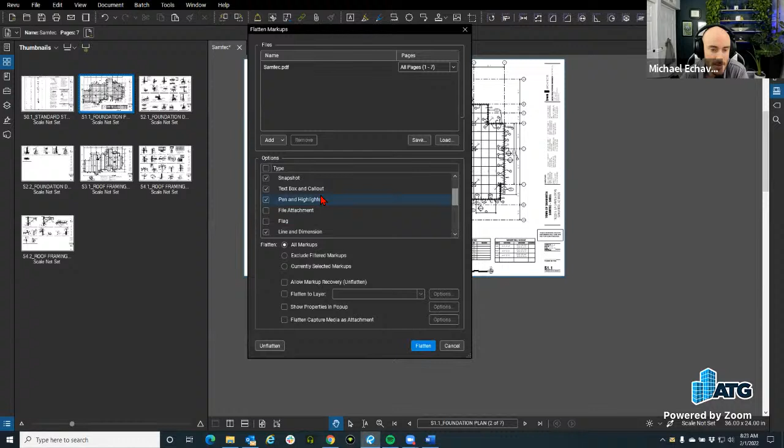Next one is Flatten, good old flatten. From here we have the ability to go through and flatten our markups. I like to use the analogy of the good old iron-on. I used to play soccer a lot when I was younger, and we used to create our custom t-shirts with iron-ons. Now you can buy an affordable t-shirt printing machine, but back in the day we'd print out these iron-ons from our computer and then iron them onto our t-shirts. It's kind of like that.

It becomes part of the PDF. Ironing it onto your t-shirt becomes part of the t-shirt, unless you wash it all the time, then it starts to peel off. But that won't happen here. What will happen, though, is you allow yourself to unflatten the data later.

Unflatten means you can go back, right-click under document management, and unflatten, meaning bring those markups back up for the ability to manipulate them. But if you wanted to send one without that ability, to make sure people can't change them, you could save out a second file, name the extension however you want, and just don't check this, because you're going to flatten all of them.

They'll become part of the PDF set. Then you don't have to worry about people moving them around, or that one-off person who likes to say there wasn't a red line there when they just missed it themselves. So they're making an excuse.

Those are your options. So from here you have options for what type of markups are going to be flattened, then exclude filtered markups, currently selected markups - maybe you selected specific markups from your markups list - allow markup recovery, which is what we talked about, and flatten to a layer. That's actually pretty cool, I haven't used this before, but you can actually flatten to a whole layer.

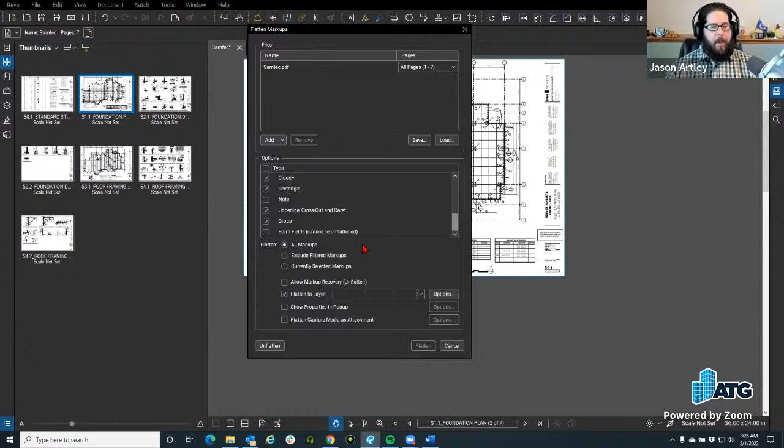David likes to save a live file before flattening, instead of relying on the unflatten function, save both. Maybe append one with 'flattened' or something so you know which one to send out. I was probably doing mine backwards, just saving one of these as a different one.

This can be done with multiple PDF sets, they don't have to be open or the current one. If you have multiple ones you're trying to accomplish this task with, you can go through and add them from here. If you have a selection you want to save, this is saved as a .bcx file, which is your batch selection. This is not for these settings down here.

All righty, you got about 4 minutes left. Can you make it all the way through?

Yeah, just markup summaries last. So markup summary is what is here. We covered markups list last week.